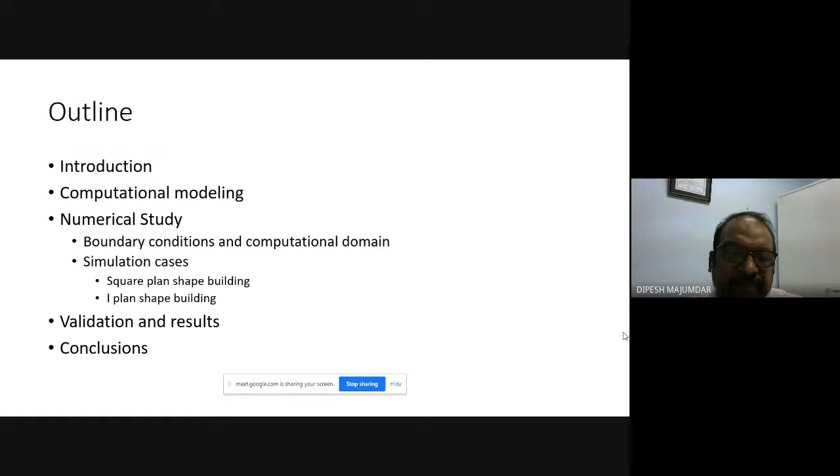An outline of this presentation: introduction, computational modeling, numerical study, and in the numerical study we'll discuss the boundary condition and computational domain, and simulation cases. There are two different cases we have studied: one is a square plan shaped building, and another is an I-plan shaped building. Then we studied the validation of the result, and finally we have concluded. So this is the basic outline of our presentation today.

Now, first of all, I will discuss the introduction part.

In civil engineering, structures nowadays face a great challenge everywhere because highly hazardous loads like earthquake, wind, and fire related loads are increasing day by day. As you know, especially this tropical cyclone intensity is increasing day by day, and for Eastern India, over the last 5 years, we are seeing the intensity and frequency of tropical cyclones increasing.

At the same time, we are constructing very different and complex shapes of buildings nowadays in India. So these two things are creating a great challenge for us.

Now, how to mitigate this type of challenge? That is a big issue, and for this particular research we have tried to study how wind load may be very crucial for a particular complex shape of building. That study we have done in this paper, and as I already conveyed, the complex shape of the building is a big issue.

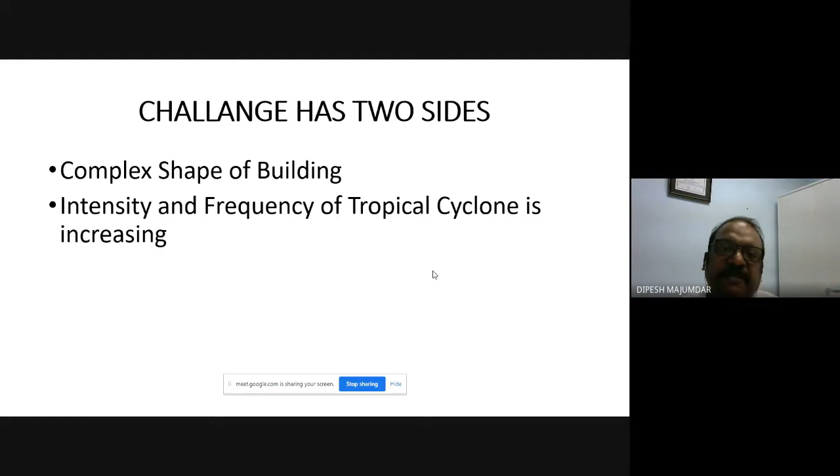So every civil engineer or structural engineer is facing two different challenges: the load is increasing or frequency is increasing, and at the same time the complex shape of the building is creating a great challenge to them.

At the same time, as you know, non-structural elements or glazings, like glass window facades, become a very vulnerable part, and we have seen this in the last Amphan cyclone in Kolkata. It was really hazardous, and various buildings faced this kind of hazard due to very high intensity of wind. Although it was properly designed and fabricated, various kinds of failure were still noticed and reported in various parts of Kolkata.

So that's why we have taken up this project to study what is the main cause, right? And this is our very simple model we have chosen during our study.

First of all, we have chosen a simple square shaped building in plan as a model study, and at the same time we have chosen another complex building to compare with an I-shaped building. For simplification, we have reduced the scale to 1 is to 300. And as you know, for this computational domain, as per Frank's model, we propose the overall boundary conditions.

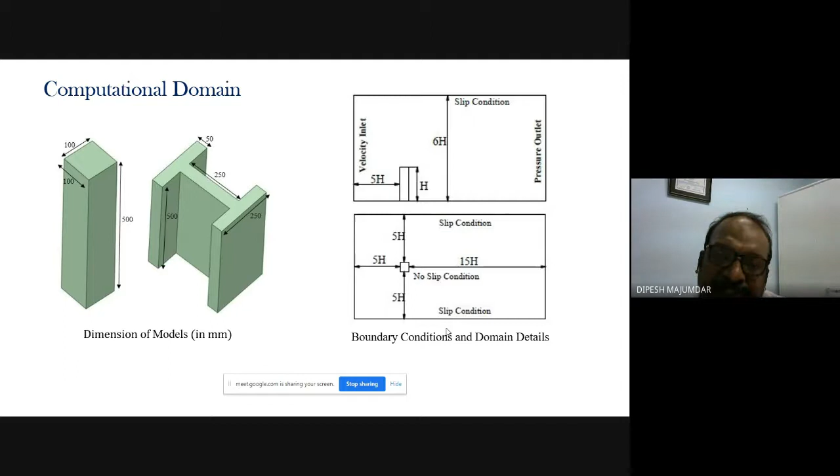And for velocity, we reduce it to 1:5, which is very common, and for the dimensional scale, we reduce it up to 1:300.

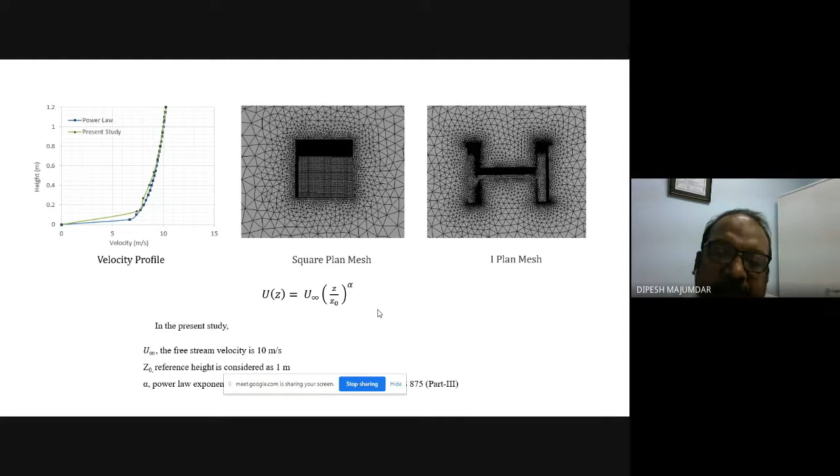This is the simulation case we have considered. For the wind, there are 3 different angles of incidence we have considered: 0, 30 degree, and 45 degree. For the square plan and I-plan, there is an extra angle, coming for 0, 30, 45, and 90. As 0 and 90 are same for the square plan, we have not considered that. For the I-plan, 90 degrees extra we have considered. And that is the different face that we have mentioned over there, A, B, C, D.

Here it is a different face, and that surface will be needed to understand the different pressure diagram that I will show you in my discussion, right?

Whatever numerical result we have produced in our numerical analysis, that analysis we have done with the K epsilon model, and this computer CFD analysis we have done with ANSYS, right?

And to match with the actual result, whatever value is given or provided in IS 875 part 3, we checked whether our model is working or not, or whatever our assumption is correct or not. We matched it, right? And this is the value that, whatever our meshing and whatever our assumptions, we matched it, and this is the property, this is the value that we matched.

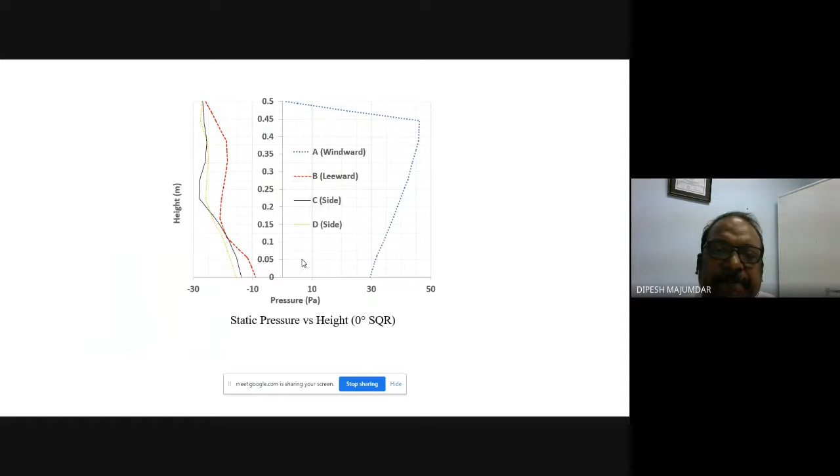30 and 45 degree you can notice over there, and on my next diagram, which is very important. See, 0 and 90 degree is very common, and it almost matches the same criteria, same diagram that I have shown you, like this static pressure diagram of 0 degree. But now, if you notice on the 30 and 45 degree, these two show really remarkable difference with respect to 0 to 90 degree.

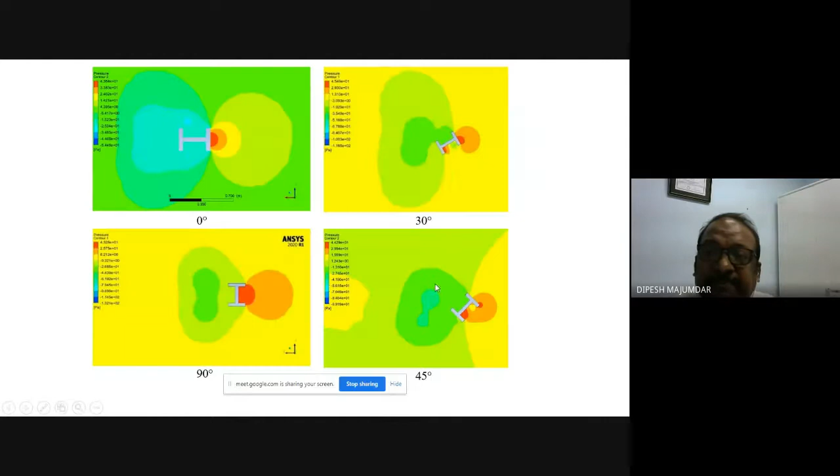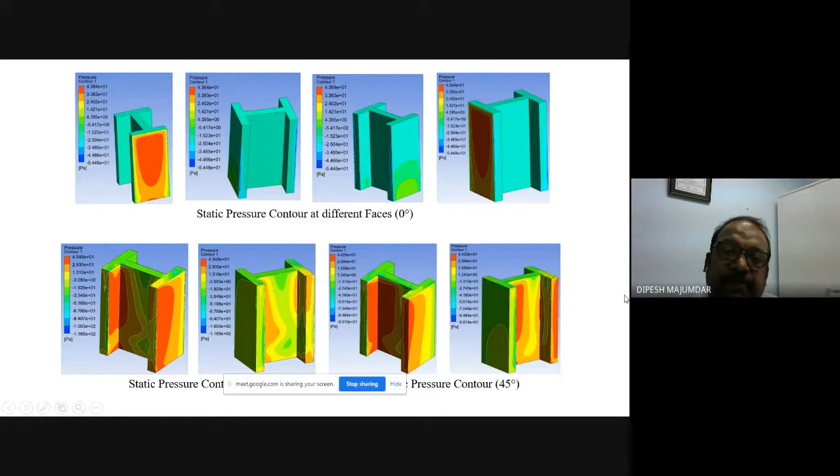This is the plan, and the pressure contour you can notice over there. See, in particular 30 and 45-degree angle, you can notice in this particular surface here that it is positive, and on the other side it is negative. So that positive and negative pressure may be very vulnerable for this kind of complex shape building. That is the thing I must convey.

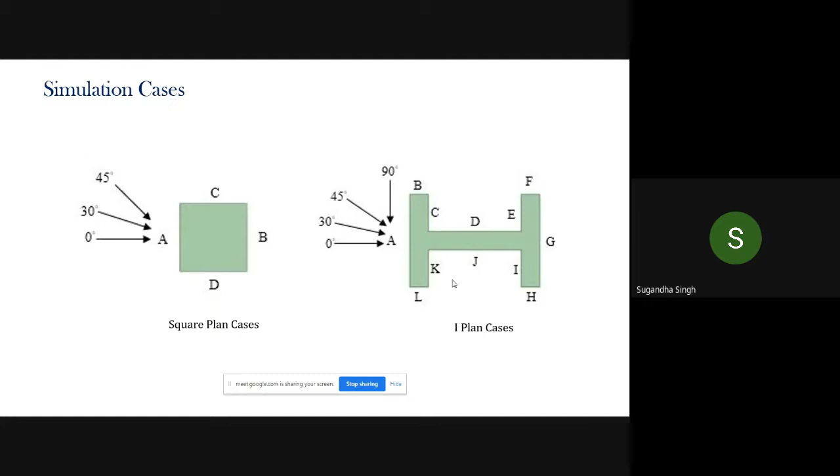So from the vortex, I guess your conclusion would be that we can find out the torsional effect on the building? Yes, yes, and then the torsion effect will affect the response. Yes, that's it, a secondary paper we are just working on over there. Okay, thank you, sir.

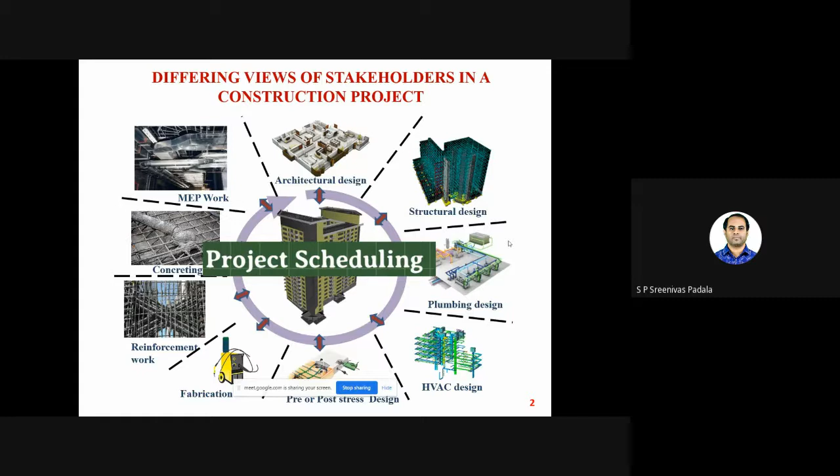So generally, if you talk about any construction project, we have different views of stakeholders. Every stakeholder has a different view: architectural design, structural design, plumbing design, till construction, and everyone works in isolation basically. So how to connect this is very important, because everyone is working for a common goal. Proper scheduling is very important. Scheduling is actually one of the critical success factors for completing a project with good profits in a given time, so we always require better scheduling.

So scheduling is generally nothing but planning your task day by day, to show how you're going to complete a project. For example, if I talk about any building project, what happens is you need to identify a set of activities—maybe 300 or 400 activities will be there to complete a project.

And you have to arrange them in a sequence manner. That is called scheduling, and we all know the critical path method, CPM. I think even in BTech you learned this in an elective course. It is one of the widely used project scheduling techniques, but it has one main limitation, which is overestimation of duration.

So CCPM is another technique, more advanced—critical chain project management. It was mainly developed from the manufacturing sector. I want to explore how it can be useful in the construction industry also, because it focuses on minimum duration—it helps minimize project duration by using safety buffers. It typically avoids human behavior errors, like student syndrome, Parkinson's law, and everything that generally happens in CPM schedules.

So for explanation, you can see this. The first one is the conventional project schedule, called CPM. If you talk about any project, let's say we have 4 activities or jobs to be done: excavation of the building, reinforcement fixing, concreting, and then finishing work. So you have 4 activities to be considered.

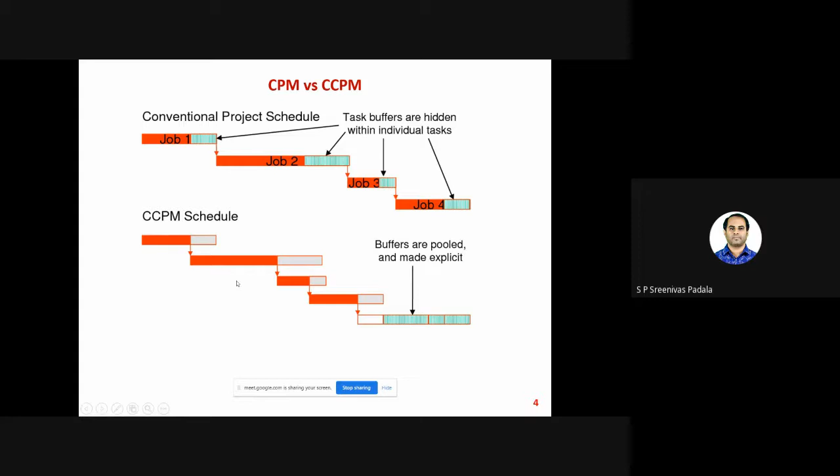But there's not only a buffer at the end—we also have buffers in between, which I will show with an example. The literature review revealed a lack of structured methodology to include or monitor buffers in construction schedules. So the objective of the study is to develop a framework, a methodology to incorporate and monitor these buffers in a project.

So we talk about buffer sizing, because when we talk about buffers, we need to estimate the size of the buffer. If you see the simple project scheduling network, activities 2, 6, 8 are critical activities. At the end of the critical activity, or critical chain, we have the project buffer, PB. We also use a feeding buffer, which links the non-critical and critical activities.

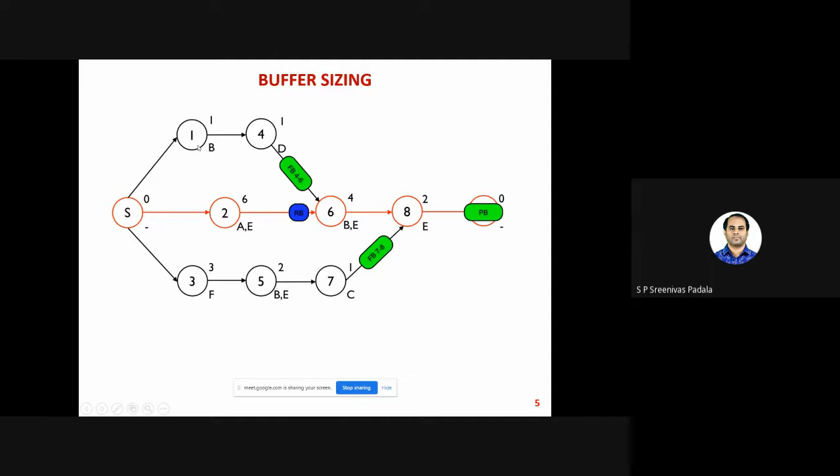This red one is, in layman language, very critical—if you delay these activities, 2, 6, 8, your entire project gets delayed. Whereas if you delay activities 1 and 4, or 3, 5, 7, it will not delay the entire project. So these feeding buffers will monitor and show the progress of non-critical activities, so that in the event of any conflicts, we can rearrange.

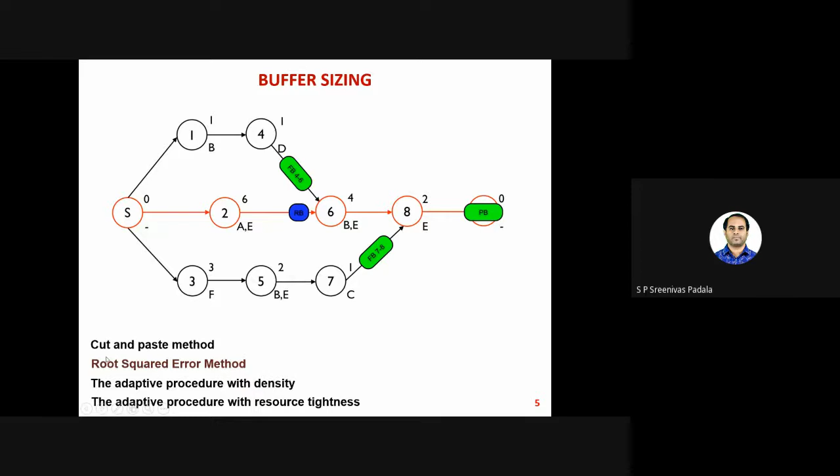There are different types of methods: cut and paste method, root squared error method, adaptive procedure with density method, then adaptive procedure with resource tightness method. Out of all these methods, I have selected root square error method because it doesn't use any rule of thumb, whereas other methods use some rule of thumb.

If you take the same example, I've explained how to calculate the buffer size for feeding buffer and project buffer. For any activity, we have to take 2 durations: one is a safe duration, then you have to take aggressive duration. Aggressive means it's the minimum time, basically. Aggressive or risky, safe duration means it has all the possible errors and all.

We assume some errors may happen, some uncertainty may happen, like that. We assume many things and we add on safe duration. Whereas aggressive duration means we assume that nothing is going to happen, nothing wrong is going to happen. That is aggressive duration. So in this root square method, we generally take the difference between the safe duration and aggressive duration, which is nothing but the root of sum of squares of the difference between the safe duration and aggressive duration for each activity.

For example, if I talk about project buffer, we take 2, 6, 8 activity. 2 here is there, 9 minus 6 whole square. Then 6 again, 6 minus 4 whole square. Then 8, 3 minus 2 whole square. And I have to give a square root.

So using this method, we can actually quantify the buffer size. The units are nothing but days, it can be anything, hours or days - let's say it is days, I'm taking it as days, then it will be days. Similarly, feeding buffer also you have to estimate in the same manner. This is how the buffer sizing is done.

This is not enough. Just by estimating the buffer sizes and reducing the project duration, it's not enough. You have to do some simulations before you start the project. As I told you, construction industry or construction projects are always uncertain in nature. So to quantify the uncertainty, I had taken low uncertainty, medium uncertainty, and high uncertainty in terms of sigma, basically nothing but standard deviation.

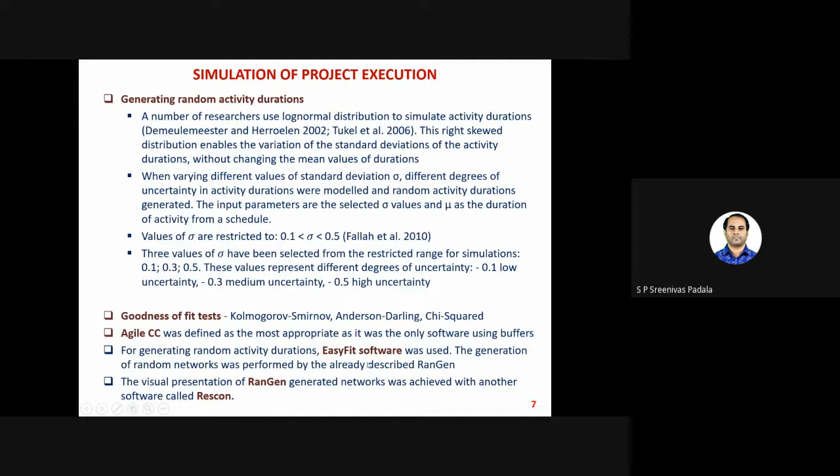We also conducted some statistical measures like goodness of fit test. Then we also use some software, because Agile CC is one of the software where you can incorporate buffers. This software was primarily developed for manufacturing industry, and we adapted it for construction industry also. Then we also use some other software like Easy Fit software, RanGen software, Rescon software, mainly for generating random numbers, for generating random activity duration within the given range.

This is a proposed methodology to implement this CCPM concept. Initially you have to develop the construction schedule, then you have to estimate the project buffer and feeding buffer, then you have to reschedule actually. Then, before you start monitoring the project, you need to check whether these feeding buffers are creating any conflicts. If it's creating conflicts, then you have to remove that part of the buffer and add it on the project buffer in the end.

If there are no conflicts, then you can identify the uncertainty and random activity durations can be generated and you can do simulations. You can also check the number of simulations - let's say we have taken this small project as 100 runs. You can also take 50, you can also take 200. So you can keep on trying, keep on doing iterations till you arrive at the best value. Once you do simulations, you can analyze the buffers, check what is the buffer consumption, and also check what is the progress of the schedule.

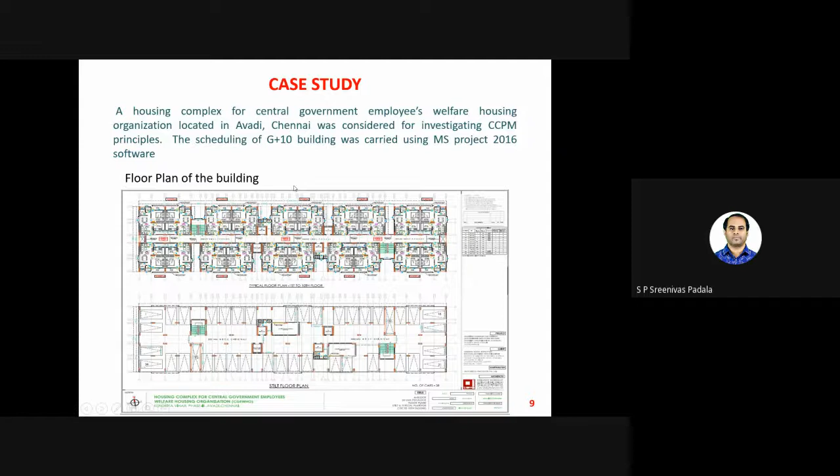So to implement this concept, we have chosen this case study - it's basically a welfare housing project in Chennai. It's a G+10 building. Initially what we've done is we have actually built an original schedule in MS Project. You can see that it's an 816 days project. We just loaded all the time, this is the sequence basically, this is nothing but a schedule. We also loaded the resources to determine the cost.

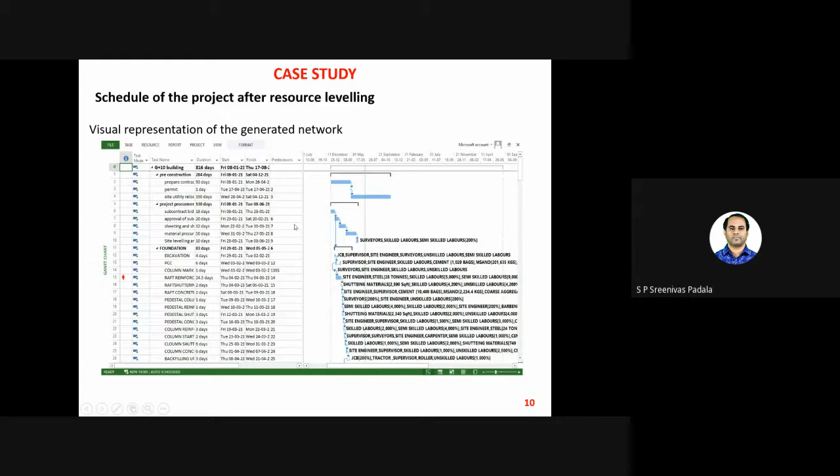And we also use Agile CC software. Mainly in this software, what we can do is we can implant the buffers. All the buffers can be planted in this. That's the best part of this.

And we quantified, so all the buffer will have to be estimated manually only. But once it is estimated, we can import this into Agile CC software, and it will show the reduced duration.

So once we estimate the duration, we've done some simulation runs and we try to understand how this feeding buffer is consumed. As you can see in this particular column, we have changed it in different dates. You can see, it's a simulation only, the dates are given. It is not yet happened, it's just forecasting.

So you can see at 0% consumption, this is the progress of the work. 30% of work is completed, and you see 74% of the feeding buffer consumption, 31% completed. This is for feeding buffer.

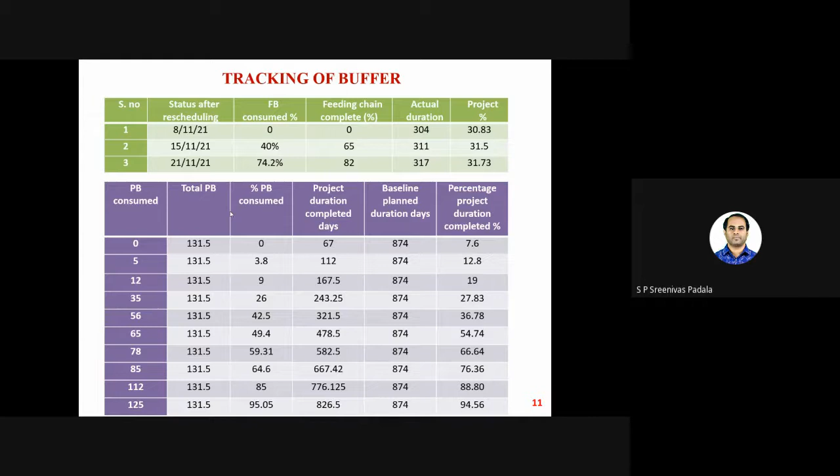And similarly for project buffer also, we tracked for different percentages, and we also track the project completion days. So as the feeding buffer is consumed, our project completion should also happen. I mean, our project should be completed before the entire feeding buffer is consumed. That's the logic. Let's see this diagram, from this you will understand what I'm trying to say.

The main idea is we should not consume the buffer before completing the project. You can consume all the buffer, but by the time you consume all of it, your project should be completed. That's the logic. So this is how we can monitor the schedules basically.

So we also did this across different uncertainties, like 0.1, 0.3, and 0.5 uncertainty. And we compared project duration with different uncertainties and with different buffers, like 10% buffer, 30% buffer, 50% buffer, and so on.

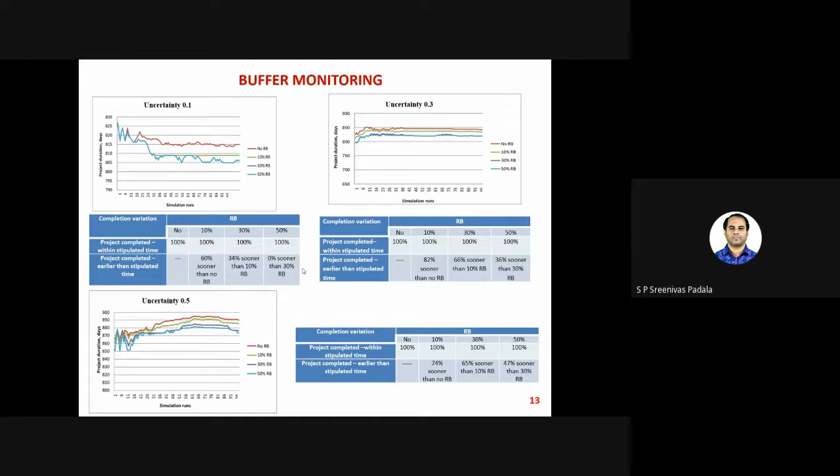So coming to discussions: the case study revealed that CCPM methodology has the potential to minimize the project duration by managing the buffer systematically, and the root square error method is one of the powerful techniques for buffer sizing.

And you can also see that for 0.1 uncertainty, different confidence intervals are generated, for example 842 to 849 days. And you can see that for 50% buffer, duration decreases a little bit compared to no buffer.

But for 0.3 and 0.5 uncertainty, there is not much difference. At zero buffer, it is 853 to 883 days, whereas at 50% buffer, it is 830 to 859 days. So what I'm trying to explain is, as the buffer size increases, the project duration decreases basically. That's the idea.

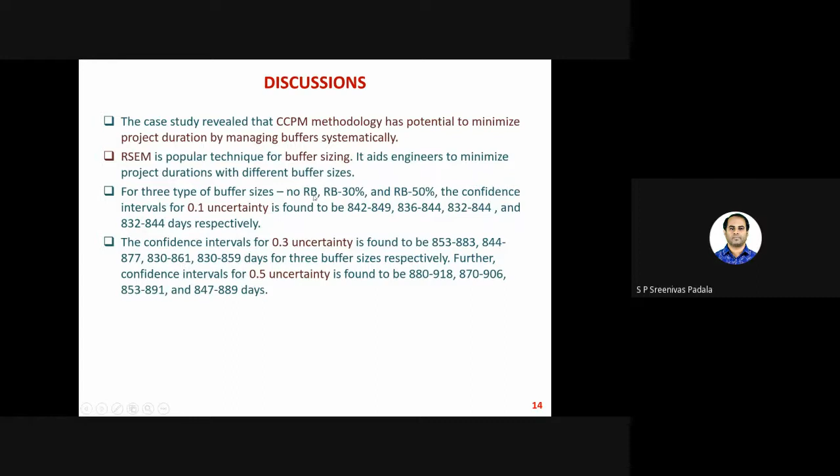So to conclude, what I can say is project scheduling is very important. It's essential for timely completion of any project, not only in construction industry but any industry we take, project scheduling plays a major role. So in this study, we developed a methodology to implement the CCPM concept in construction projects.

As I told you before, CCPM is a potential technique because it will generate accurate scheduling by considering the buffers. Unlike traditional techniques where we add safety buffers in a hidden manner, we actually put all the buffers at the end of the project or end of the non-critical activity. That's the best part in CCPM.

But again, it is not a decision-making tool. It will not give data like that directly. It will give some results, and using this concept we'll get some data, but you have to interpret the data based on your project. So it is not a decision-making tool, but it will support decision-making with necessary information.

As I told in the previous presentation also, accurate information is very important. Accurate input to the project should be given - that is more important than anything else. You can use different techniques, more mathematical or high-end software or high-end analytical techniques, but still if the information is not correct, if the input is not correct, then this concept will not work better. That's what CCPM does - it gives accurate or necessary information to the construction industries.

So these are my references. These are some of the important references I am showing in the slide.

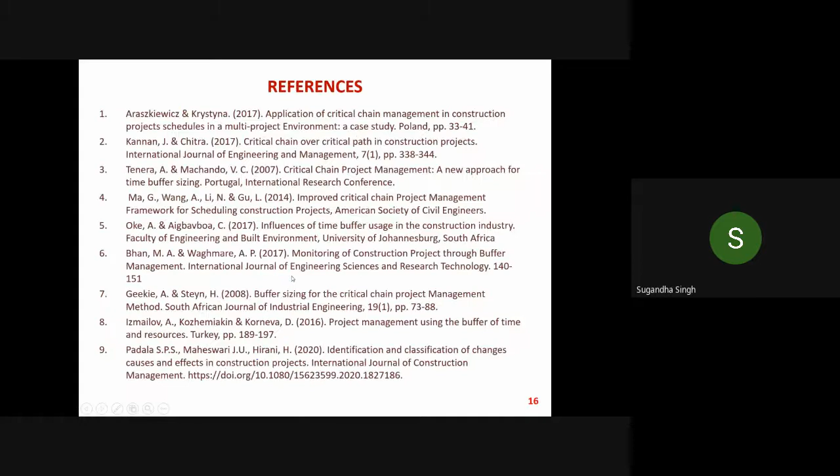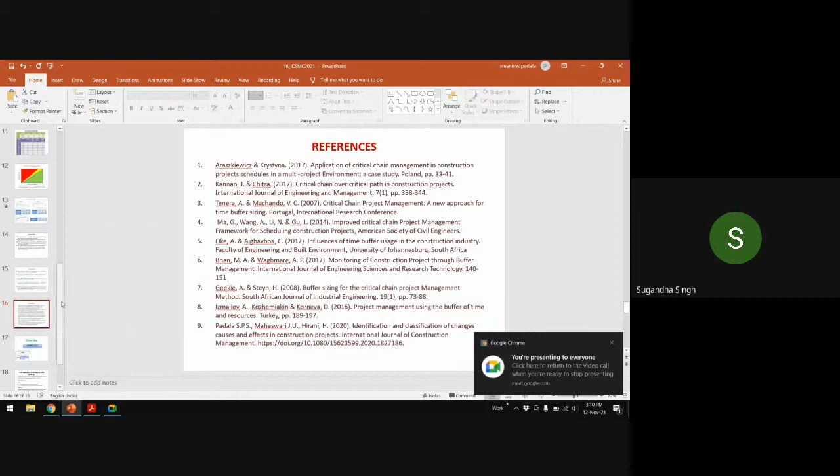Thank you, sir. It was a very informative presentation. Are there any questions from the audience? Please unmute yourself and ask your question. Anil sir, any questions? No question.

This project scheduling depends on the list of tasks that you have to perform during a project, which is decided in the planning phase, like tendering and all of that phase. Now, how does anyone doing the project monitoring incorporate anything like finance problems in the middle of the project, or snags or things like that? Is there a provision for that?

Yeah, that's what the buffer concept is - the buffer takes care of all types of problems. If we have any sudden issue, like COVID came and the project is delayed by 3 months, let's say, this buffer will take care of that delay. Or if any financial problems come, like cash flow is not good suddenly, or the contractor has to change, or maybe the client wanted to change the contractor - so all sorts of uncertainties like delays, financial issues, even quality issues, everything can be taken care of by the buffer. That's the idea of the buffer.

It's like a safety buffer which is added to the end of the project, so you can use it if required. But then the follow-up question is, when you were calculating the buffer, I thought that was based on the existing activities. Yes, existing activities, that is correct. So if we calculate that based on existing activities, what is the provision to account for such major delays?

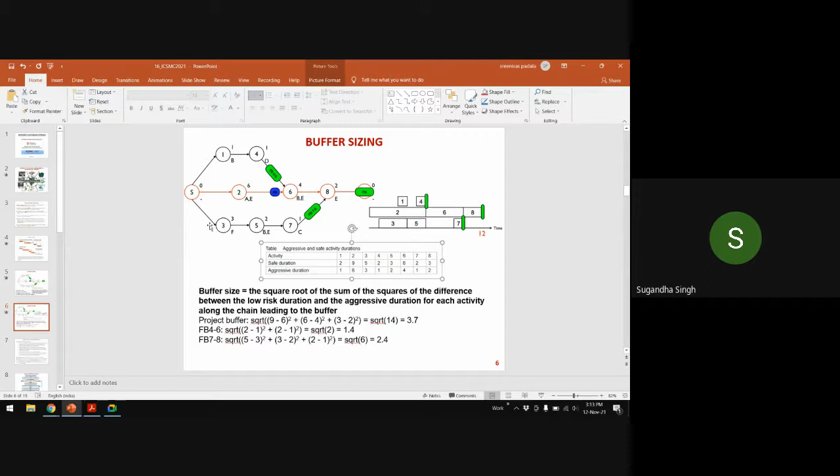All right, so I see you have incorporated uncertainties as well. Yes. So it would be more of a probabilistic scheduling in a way. Right.

Probabilistic is okay, probabilistic only. That's why, as I showed here, I gave a range - 6 to 9 days for that activity, starting from 6 days to 9 days. So we have that range, and that's why I simulated to quantify that uncertainty. We use normal or log-normal distribution, which is equivalent to triangular distribution, to quantify the uncertainty.

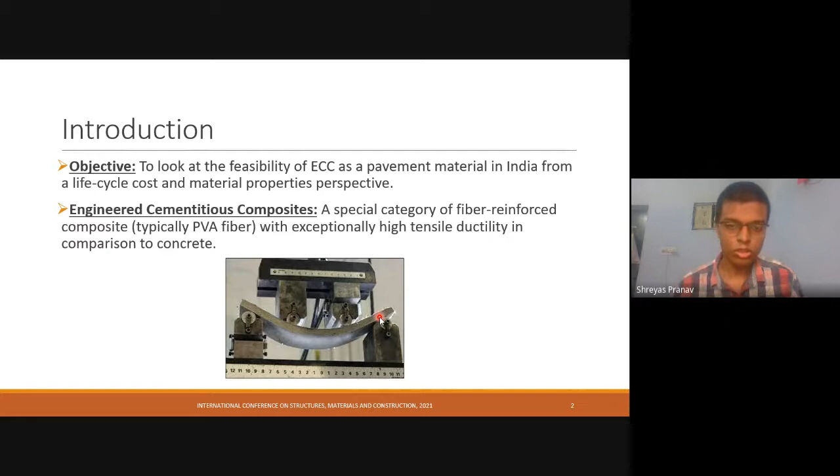Coming to the need of this new material in pavements - first, what are the problems in existing pavement materials. When it comes to asphalt, we all know it comes from petroleum, and petroleum reserves are fast dwindling. According to many world energy reviews, it is not expected to last more than 50 years. We also have our own experience that asphalt pavements are very prone to distresses, cracking, potholes, and so on. The natural alternative is concrete, but in concrete there are other issues - it typically has to be made using joints, because of its low ductility and the stresses that appear in concrete pavements.

As soon as we talk of joints, there is the problem of material ingress into joints, acid attack, joint spalling, pumping, and so on. Because of these reasons, both these types of pavements require a lot of repairs, and they have a very low service life, close to 20 to 30 years approximately - asphalt pavements can even be lower than 20 years sometimes. So our proposition is to offer a material which gives a higher service life and lower requirement of repairs with high durability.

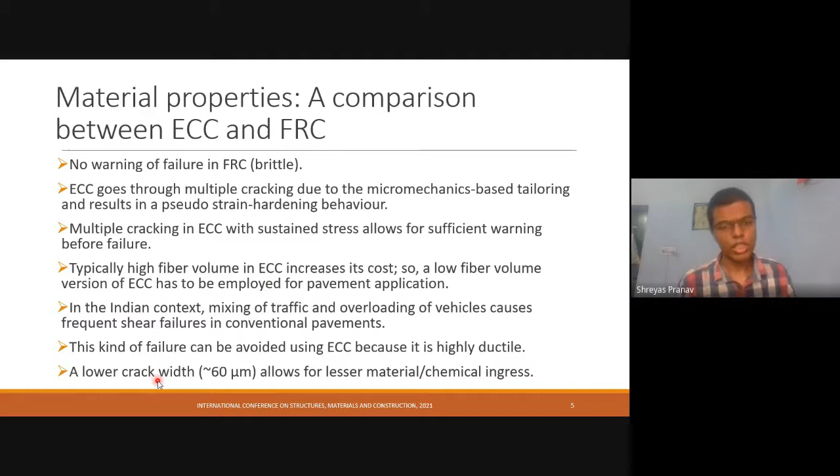Over the life cycle, by which I mean we have taken an analysis period of 50 years, we tried to compare the total life cycle cost, including all the repairs and all the labor costs and maintenance, everything. Per meter cube, it turns out to be around 20,000 for RCC and about 14,600 for ECC.

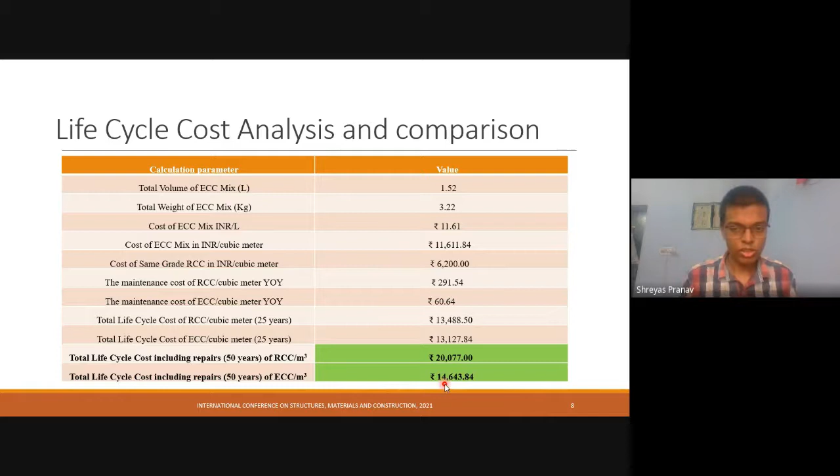In conclusion, as we have already discussed, from a material properties perspective, it was seen that for the Indian context, a high tensile ductility material will offer a much more durable pavement than conventional concrete and asphalt. The self-healing and tight crack width allow for lower material ingress.

Using low fiber content is important for the Indian context because there is a huge road network and cost effectiveness is very important. This final life cycle cost assumes low fiber content compared to typical ECC, and the life cycle cost analysis indicates up to a 30% reduction.

This is compared to RCC pavements, but over a 50-year analysis period, because in 50 years the RCC pavement will have to be rehabilitated multiple times, which is not the case with ECC. If you consider only the initial cost, ECC is much more expensive than RCC, but over a long period of time it eventually results in a reduction.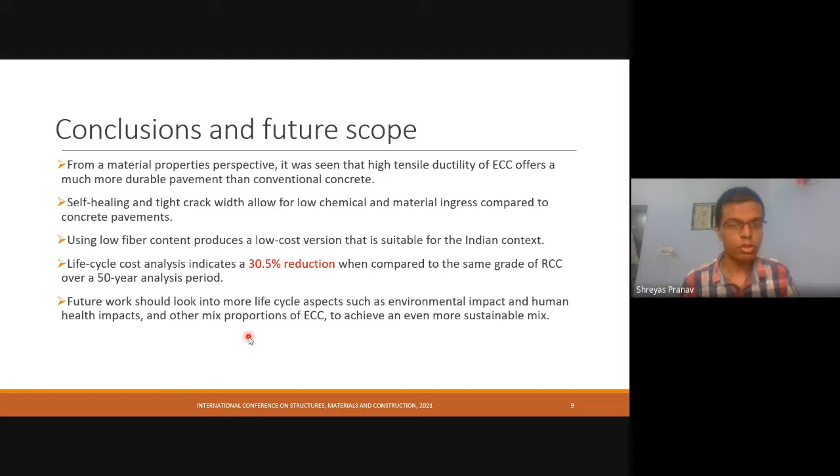But this is an elementary study, and there are many more aspects of life cycle that can be considered, such as environmental impact and human health impacts, and other mix proportions of ECC, so that even more sustainable mixes are formed, which can offer even more reduction in costs and environmental impacts.

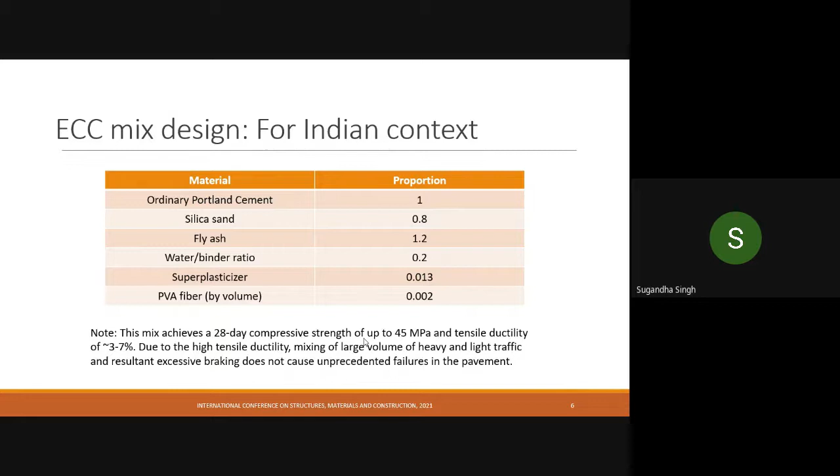Another thing I wanted to ask is, you said that the panels or stretches of ECC can be much longer than concrete, something like that, right? Yes. So how feasible are those panels construction-wise? Can you actually construct that length of road at once for ECC? Of course there is some limitation, you cannot go on constructing the pavement for as long as you want.

At one point we have to stop, but in principle it is possible to construct longer ECC pavements than concrete because it will take care of the stresses on its own. There is no need to prepare separate slabs like 1 meter or 3 meter slabs like we do in concrete. So that way, jointless ECC pavement is what you were discussing. Yes.

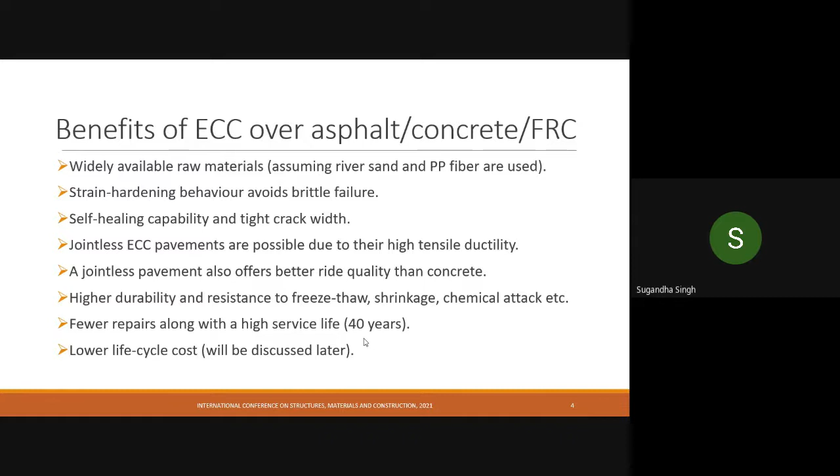Ms. Pratibha will be presenting on utilization of plastic waste as an alternate binder and plastic coated aggregate in interlocking paving blocks.

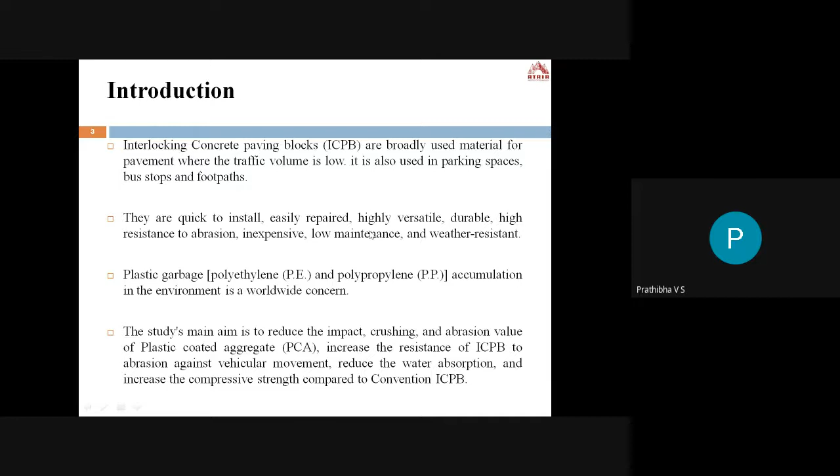After the casting of ICPB, it is tested for mechanical properties at different curing durations - 7, 14 and 28 days. Compressive strength, abrasion value, and water absorption tests are conducted.

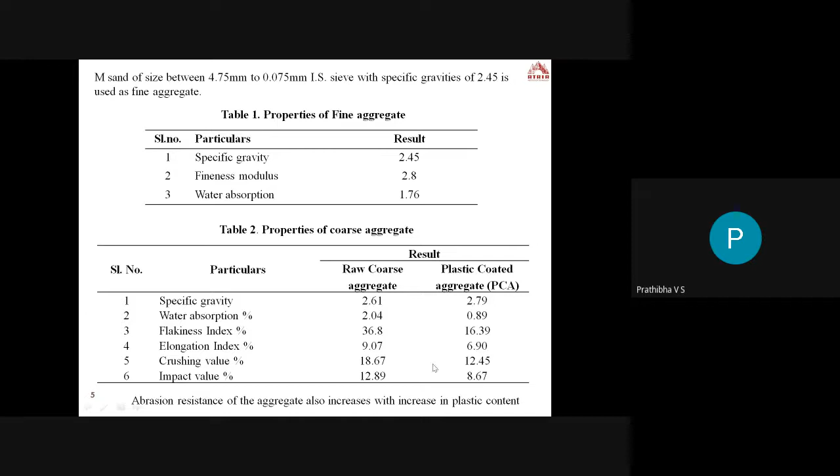Which offers more resistance to crushing and impact load.

So next coming to the mix design. As I said, we have used M40 grade concrete, and the water cement ratio is 0.38. We have prepared 5 different mixes.

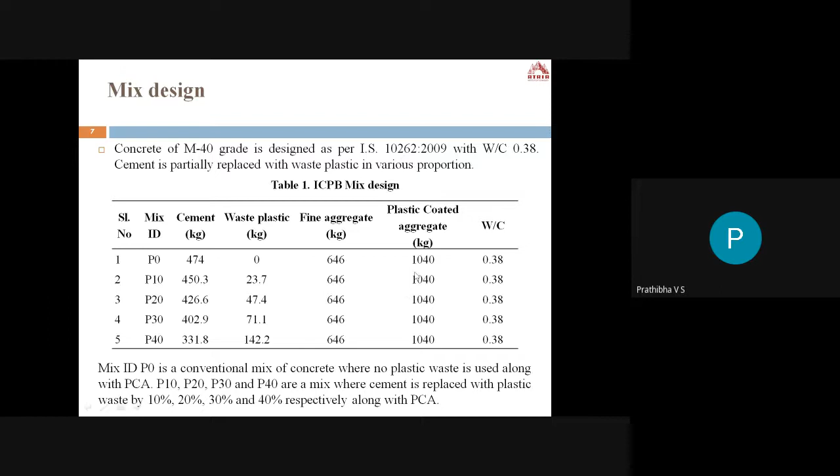P0 in the mix design represents the conventional concrete, whereas P10 means 10% replacement of plastic waste as a binder to the cement. P20 is 20% replacement of plastic waste for the cement, P30 is 30%, and P40 is 40% replacement. Here the fine aggregate content remains the same, whereas the raw aggregate is completely replaced by PCA, the plastic coated aggregate.

Next, coming to the mechanical properties of the ICPB blocks, this shows the compressive strength of the concrete block pavement.

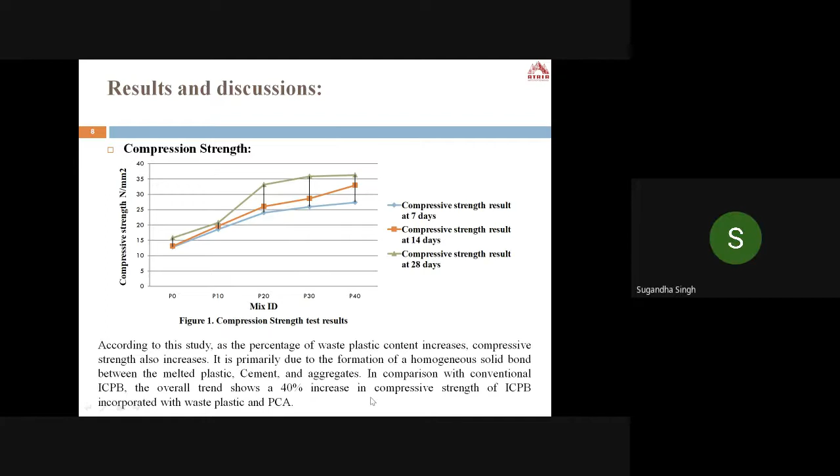The result shows the compressive strength of the ICPB for 7 days, 14 days, and 28 days curing. With the increase in plastic percent, there is an increase in the compressive strength, even though the plastic content is reducing other material. So it is increasing by around 40%.

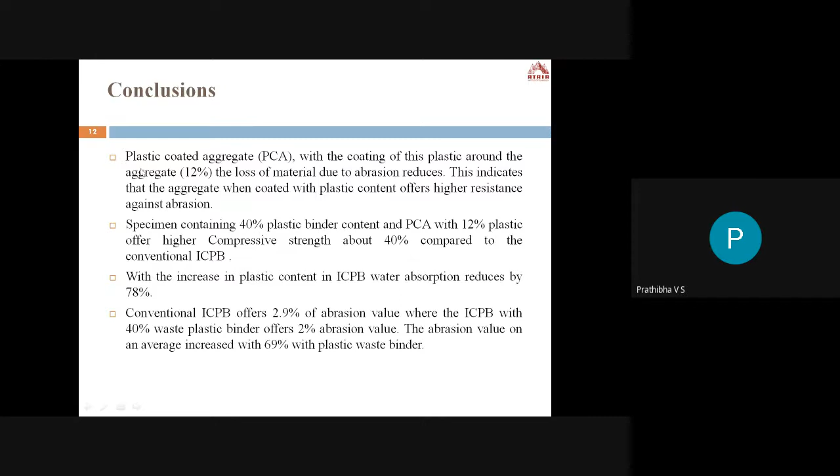So it is even economical, and we can see the strength parameters and also the abrasion resistance. It is more helpful by using the plastic waste in the interlocking paving blocks.

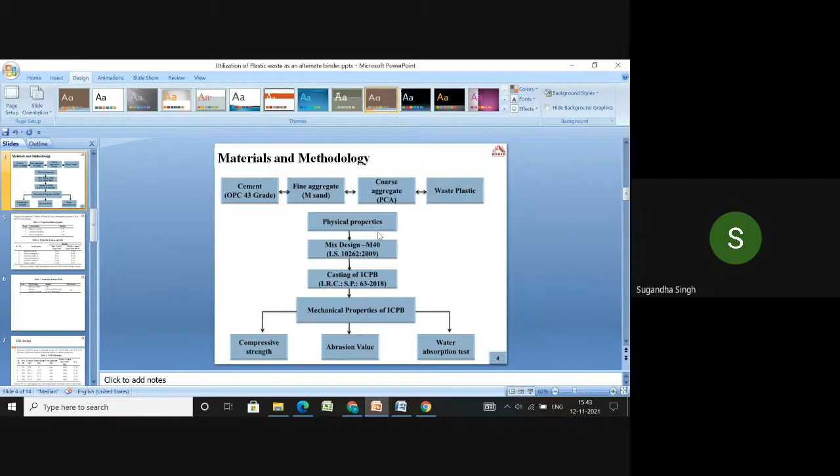Yes ma'am, here water absorption is lowered. However, my first question is why is the actual weight reducing? Actual weight is reducing because the cement content is reducing. The density of cement is 1.44, whereas the density of plastic waste is 0.99. So as we increase the plastic content, the weight of the block is also reducing.

What is the implication of the reduction in water absorption in terms of concrete pavement? If the block is getting saturated with water, there may be chances of stripping of the aggregate or stripping of the materials, and it may also reduce the strength of the subgrade. So if we reduce the water absorption percentage of ICPB, there will be an increase in strength.

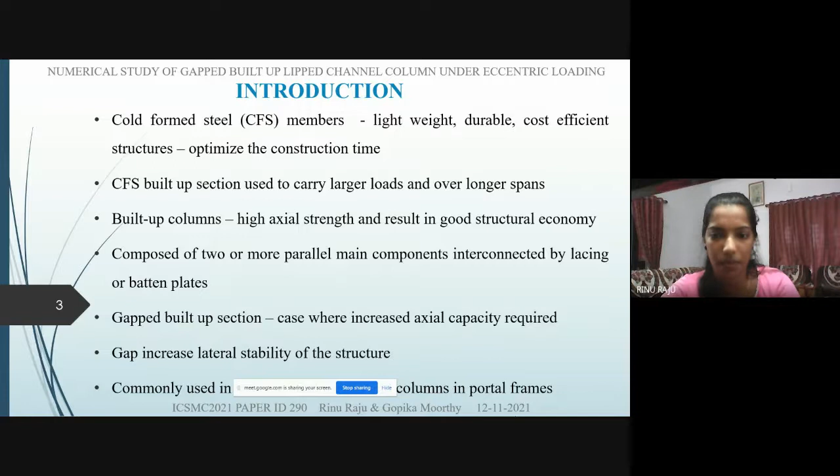The objectives of the study are to investigate the behavior of back-to-back gapped built-up CFS columns under eccentric loading, to study the effect of parameters such as link channel spacing, gap width, and slenderness on the performance of the column, and to investigate the influence of the web stiffness. This is the methodology. Moving on to the validation.

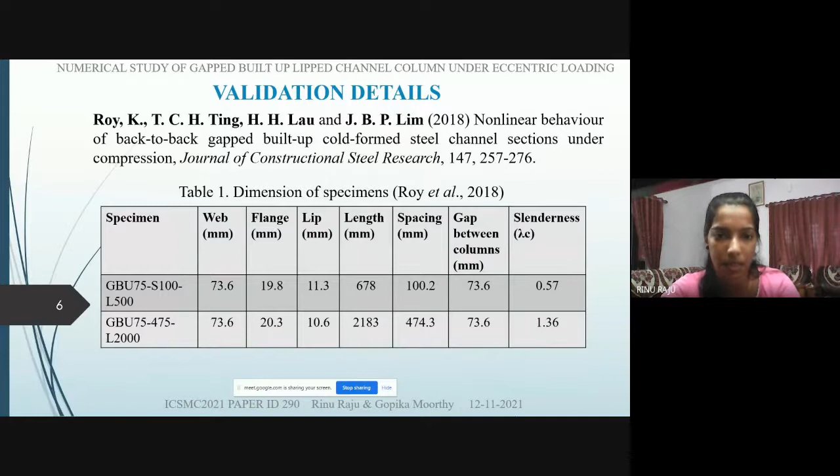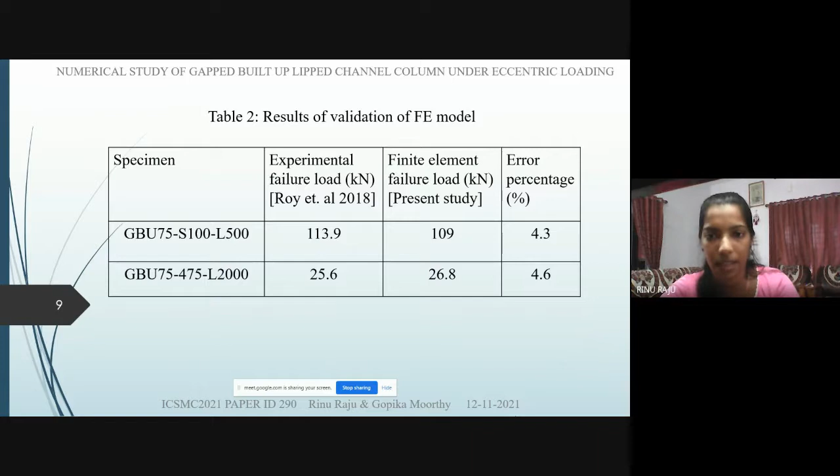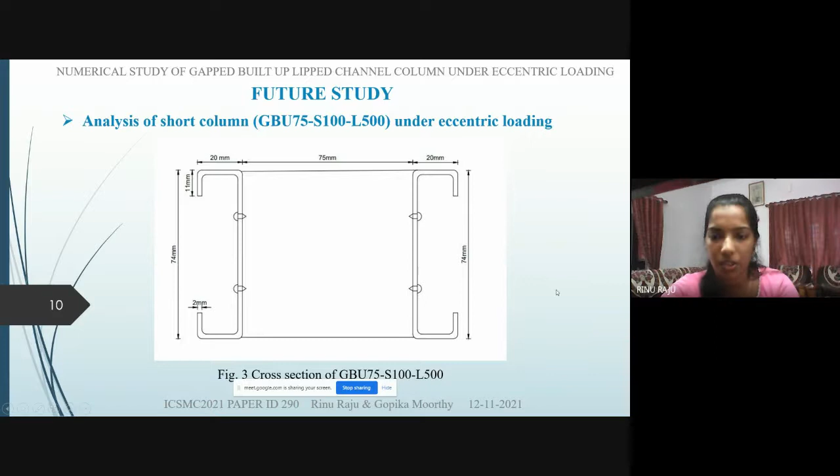As shown in this figure, this gapped built-up column consists of two main channels placed back to back with a gap in between them, and the gap is formed through the intermediate link channel provided between the webs of this back-to-back channel section. The section labeling is such that GBU75 indicates back-to-back built-up channel with a gap width of 75mm, S100 indicates intermediate link channel spacing of 100mm, and L500 indicates column length of 500mm.

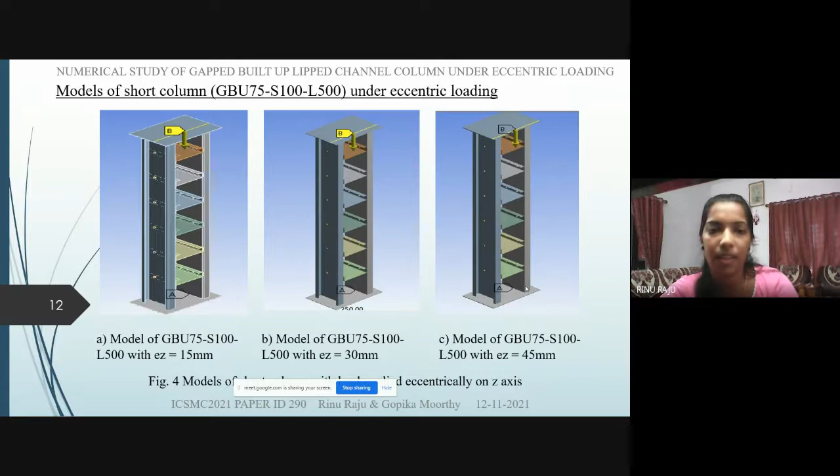These are the models of the short column. A nonlinear analysis was conducted on ANSYS workbench, and these are the models of this short column under eccentric loading. Here the eccentricity varies from 15mm, 30mm, and 45mm. This is a top view of the loading plate with eccentric load applied on the z-axis.

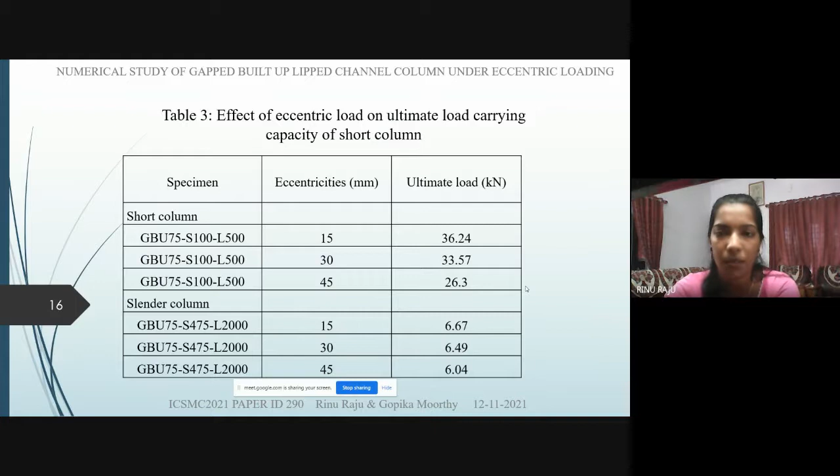Two main parameters were studied here: one is intermediate link channel spacing and the other is gap width. Moving on to the first parameter, that is the effect of intermediate link channel spacing.

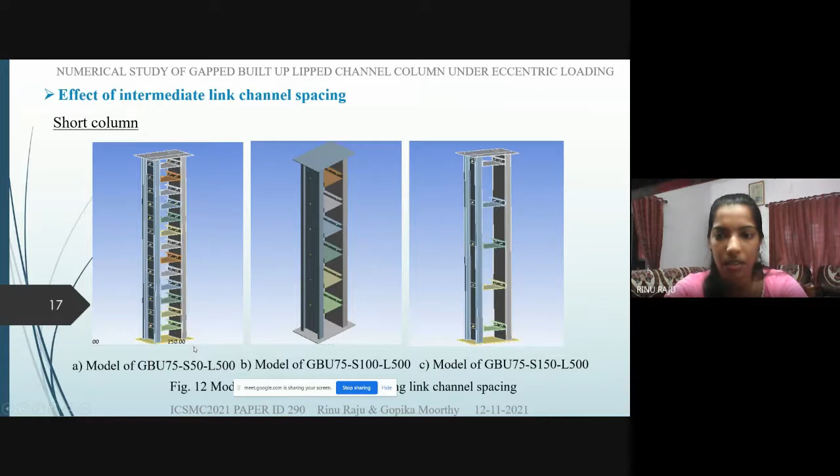Intermediate link channel is a channel provided in between the gaps of the main channel section. The spacing of this intermediate link channel varies from 50, 100 and 150 mm, and these are the models of the short column with varying link channel spacing.

For short column, the gap width remains the same as 75 mm and the link channel spacing varies from 50, 100 and 150 mm. As the link channel spacing increases, the load carrying capacity gets reduced.

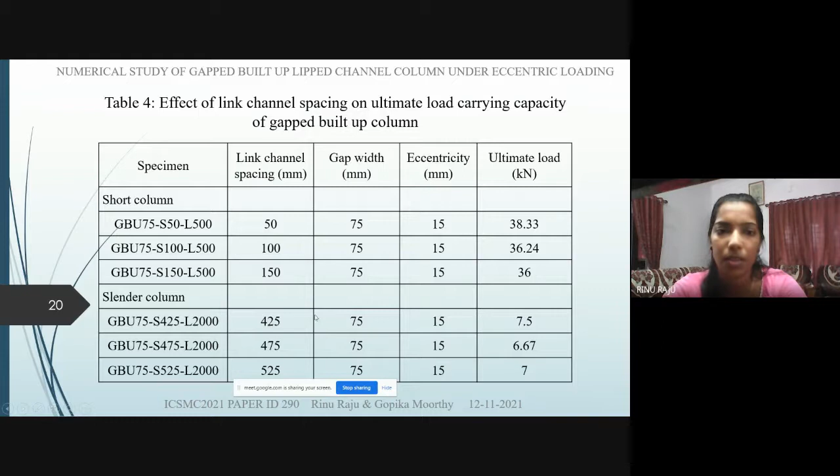In the case of slender column also, the gap width remains the same as 75 mm and only the link channel spacing were varied, that is 425, 475 and 525 mm. Here also, as the link channel spacing increases, the load gets reduced.

Next one is the effect of gap width. Gap width is the width of that gap provided in between the main channel section. The gap width varies from 50, 75, 100 and 125 mm.

In the case of short column, the link channel spacing remains the same as 100 mm and the gap width varies from 50, 75, 100 and 125 mm. For slender column, link channel spacing remains the same as 475 mm and only the gap width varied.

As the gap width increased, the ultimate load carrying capacity gets reduced in the case of short column. In the case of slender column, as the gap width reduced to 50 mm, there is a considerable increase in load obtained - about 10 kilonewton was obtained as the ultimate load, and after that the load gets reduced.

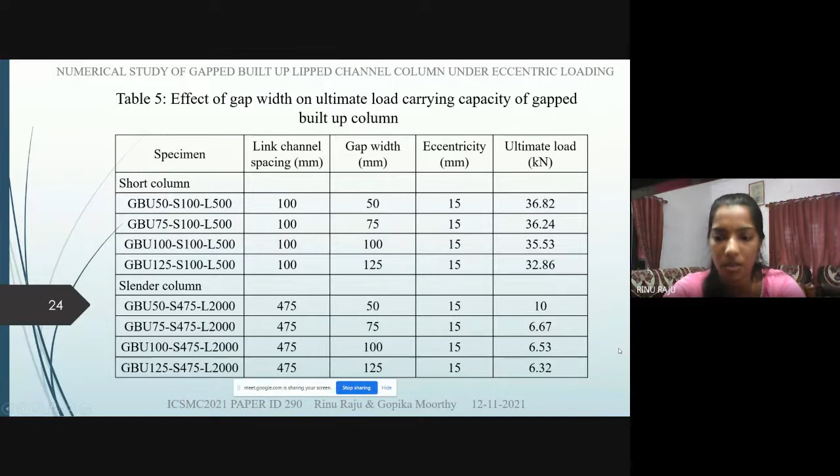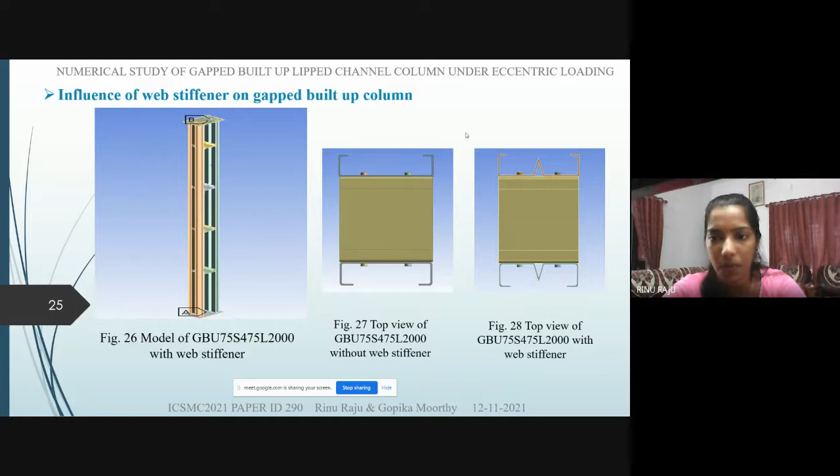Moving on to the conclusion. The study was conducted on this gap built-up column under eccentric loading, and parameters such as link channel spacing, gap width, and slenderness were examined, along with the influence of web stiffener.

This analysis concludes that eccentricities had a significant influence on the ultimate load carrying capacities of these built-up columns. The load carrying capacity decreases with increase in eccentricity values, and reduction in link channel spacing improves the load carrying capacity. The maximum load was obtained for a link channel spacing of 50 mm.

In the case of short column, varying gap width does not produce much improvement in strength, whereas in the case of slender column, when the gap width reduced to 50 mm, a greater improvement in ultimate load was obtained - about a 50% increase in load.

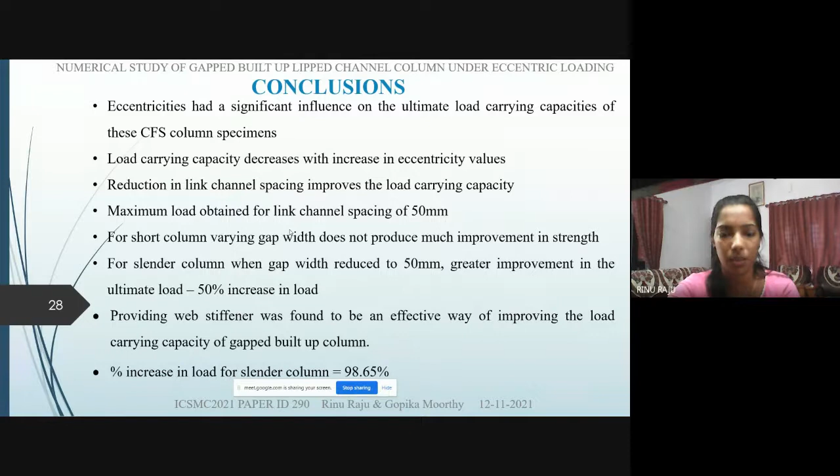Providing web stiffener was found to be an effective way of improving the load carrying capacities of this built-up column, and the percentage increase in load for slender column by providing web stiffener was about 98.65%.

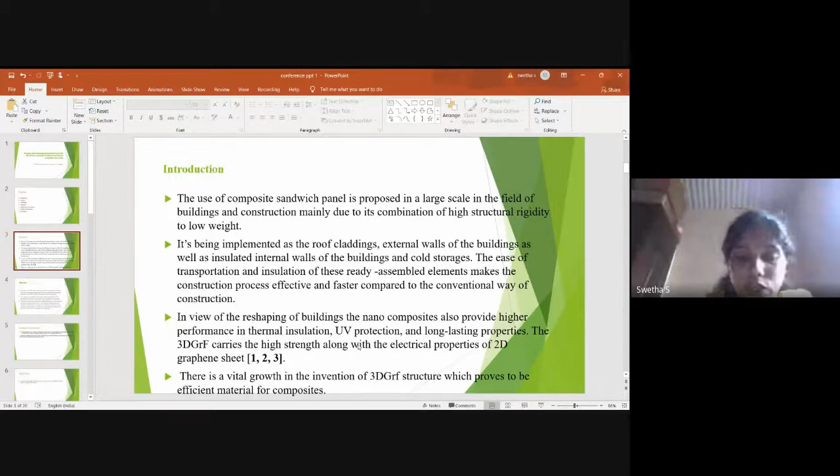The 3D graphene core, the 3D graphene foam carries high strength along with the electrical properties of 2D graphene sheet. There is a vital growth of the invention of 3D graphene structure, which proves it to be an effective material. In this paper we have studied the functionally graded carbon nanotube reinforced polymer faces with three-dimensional graphene foam, and I have studied the dynamic properties of this structure as well as the static properties.

The equivalent properties of the reinforced carbon nanotube and the 3D graphene foam are calculated, and the porosity and mass coefficient relationship are calculated from the mechanical properties of 3D graphene. For dynamic properties, we have used Hamilton's principle here. The third order shear deformation theory is implemented.

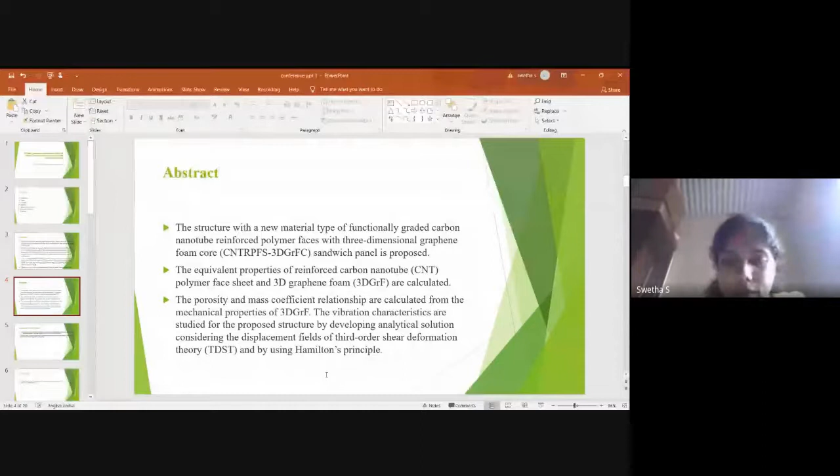The advantages of the sandwich panel: we know it is used in transportations, bridges, aircrafts, mainly buildings, high speed trains as well, because of its high strength to weight, low weight capacity. And the objective: the dynamic characteristics of sandwich panel with 3D graphene core and FG CNT reinforced polymer composite.

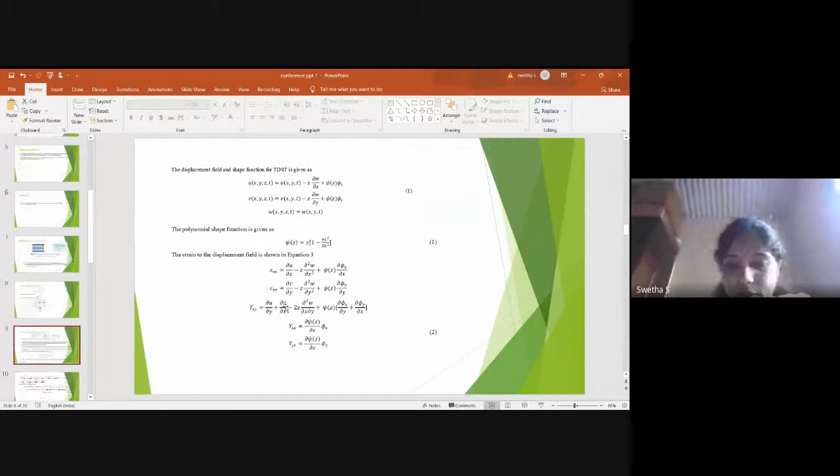The first order shear deformation theory and sinusoidal shear deformation theory were used earlier, but here I have used the third order shear deformation theory again for the dynamic property as well. The strain displacement concerned with the stress is given here, and the stress relationship is formulated in a matrix format. The abbreviation used here is 3D graphene and UVP, which is nothing but uniformly varying porosity and non-varying porosity surface.

Now, here in static analysis, we have used the virtual work principle formula, and for dynamic work, we have used Hamilton's principle. In Hamilton's principle and in the virtual work principle, the only difference is we have T here, which is something that in Hamilton's principle...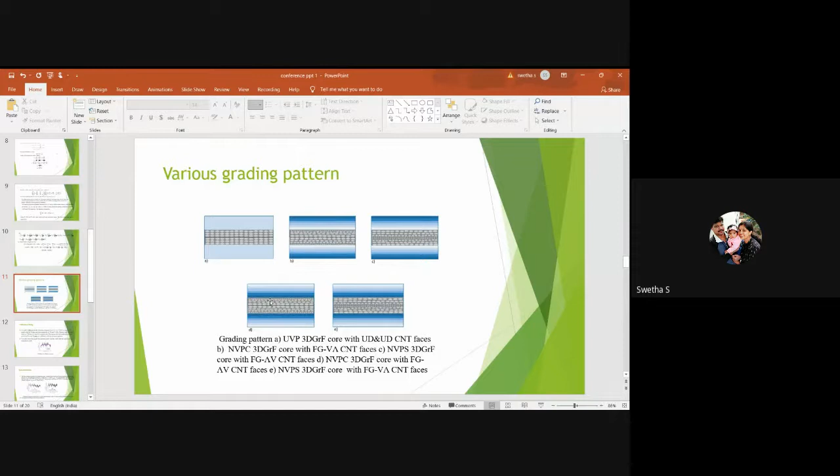The core is varied in B and C. You can see the difference here: bigger bubbles or holes in one, and in the C image, smaller holes. D and E show the non-varying porous surface, where there is variation of material distribution across the surface of the core.

Next is the validation study of my research. I have used the Liu and Lee paper, which gives the vibration response for a 0.4 by 0.3 by 0.01 meter sandwich panel with facing and core properties of 70 and 7 GPa. We know that the density and Young's modulus properties of graphene core and CNT are tremendously high, in terapascals, compared to steel and other metals.

So the numerical and analytical results given by Liu and Lee were validated with the present approach. The validation study proves that all my results match well with the numerical and analytical results of the literature. In the results and discussion, the free vibration response of the sandwich panel is studied, after which the forced vibration properties are also calculated.

The vibration response of FGCNT reinforced polymer foam sandwich panel with CNT and porosity coefficient is also shown. Now the analysis is repeated by changing the non-varying porous core porosity coefficient to 0.6, and the response is shown in figures 5A and 5B.

This is the response given. Comparing figure 4 and 5, it is noticed that a higher shifting resonance frequency is observed in figure 4, due to the elevation of variance in dynamic stiffness that increases the porosity coefficient as a whole.

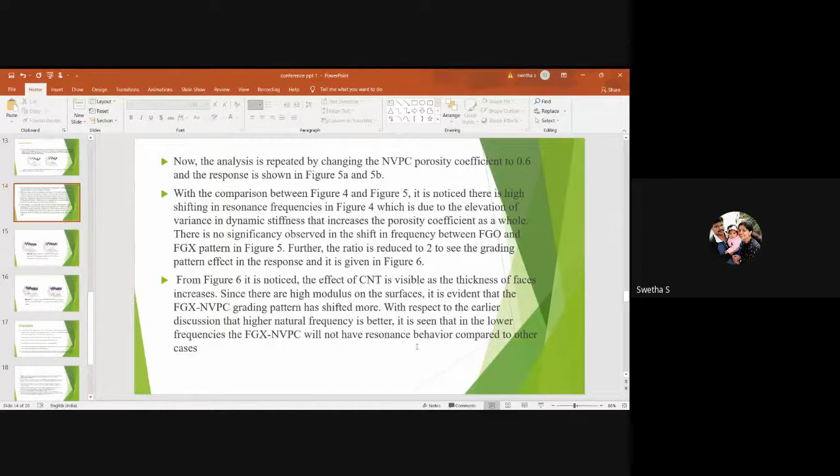As the porosity coefficient increases, there is an increase in resonance frequency. For the NVPC pattern, the resonance frequency shifts right as the porosity coefficient decreases. As this paper presents the characteristics of a lightweight composite sandwich panel, the results obtained can be used for designing sandwich panels for various applications where lightweight sandwich structures are preferred. So these are my references.

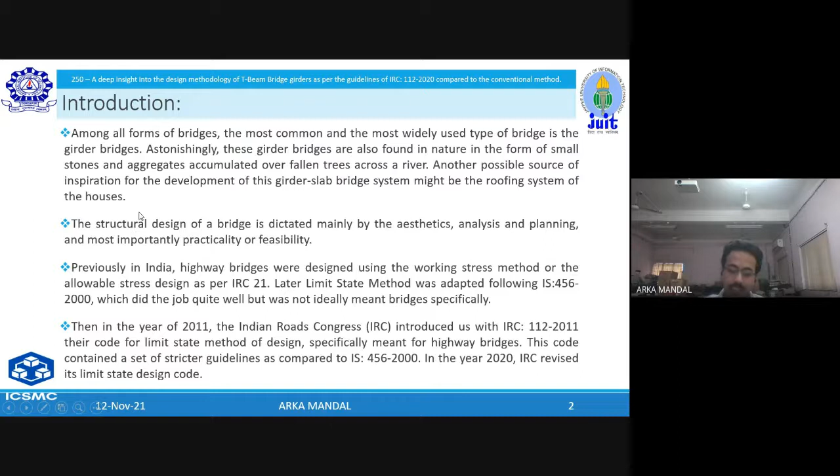Previously in India, highway bridges were designed using the working stress method or allowable stress design as per IRC 21. Later, the limit state method was adapted following IS 456-2000, which did the job well but was not ideally meant for bridges specifically. Then in 2011, IRC introduced their code for limit state design, IRC 112-2011, which contained a much stricter set of guidelines compared to IS 456. Later in 2020, this code was further revised.

For design methodology, we mainly have two types: the ultimate limit state and the serviceability limit state. Basically, limit state refers to that system and combination of loads under which a structure does not give satisfactory results, both in terms of serviceability and strength.

IRC suggests that all sections must remain plane before and after bending. The plane of bending must coincide with the principal axis of the element, and strain compatibility for tension as well as compression must be satisfied. These provisions apply only when members are elongated, and regions of discontinuity caused either by variation in geometry or high transverse loading should occur in only small portions along the length of the member.

IRC 112 allows us to use any elastic method for the analysis of two-way slabs, and the most commonly used method is Pigeaud's curve method. Since this method is only applicable for centrally placed loads, for non-central loads we can use appropriate superposition principles. For load distribution among the longitudinal girders, the most frequently used method is Courbon's method. However, there are other methods as well, like Hendry-Jaeger's method or Guyon-Massonnet's method.

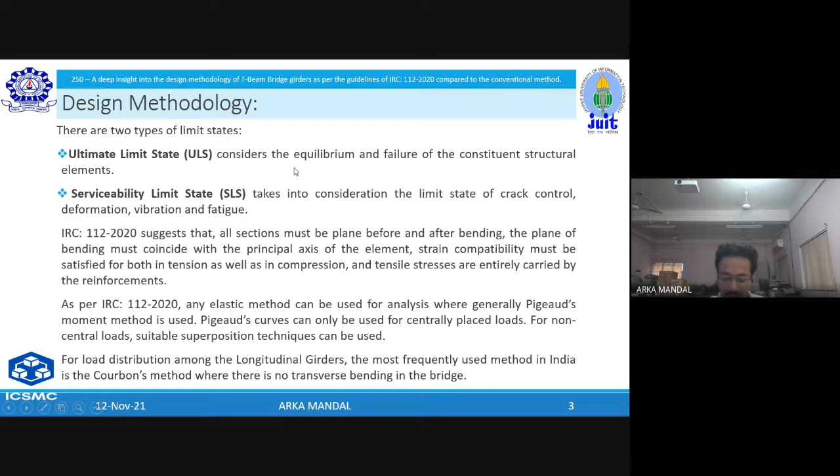For material properties, IRC permits the highest grade of concrete to be M90 and Fe 600 for steel respectively, both conforming to IRC 06-2014. The limiting strain for concrete up to M60 grade is constrained to 0.0035; beyond this, values should be obtained from the given code.

Now for a sample problem, we have this bridge cross section. We need to note that the width of the carriageway is 5 meters. Mainly, the width of bridge cross sections is generally more than 5.3 meters, which accommodates all sorts of vehicles like class A and class B simultaneously. But in this case, the width is less than 5.3 meters.

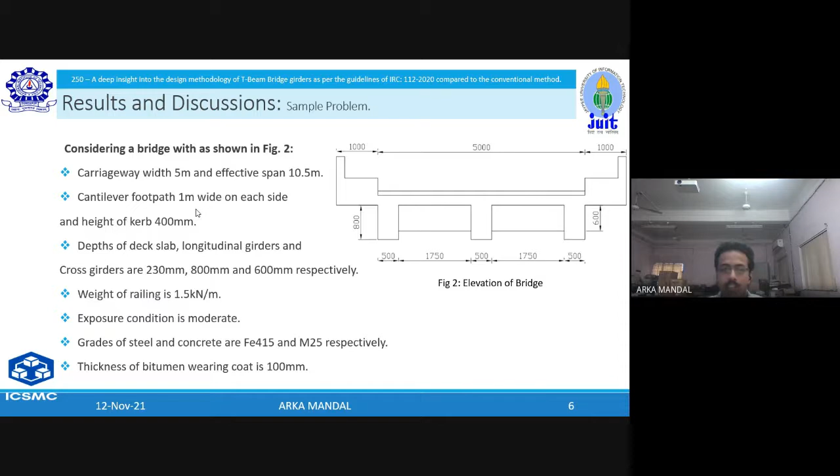As shown in the previous figure, the width of the cross girders is 500 mm, and the deck slab is 2.67 meter by 1.75 meter. Since the aspect ratio is less than 2, it will be treated as a two-way slab.

As previously said, the width is less than 5.3 meter, and so it shall be loaded with a UDL of 500 kg per meter square as specified by IRC 6.

Pigeaud's method can be used for the evaluation of moments for the two-way slabs, and the moment coefficients can be found from the Pigeaud charts based on the aspect ratios.

IRC 6 2017 suggests that there should be a minimum 150 mm gap from the curb of the bridge and the vehicle. But in reality, there is a high chance that this provision will not be followed. In that case, we need to be cautious and design the curb so it can take the vehicle load in accidental situations. So for that case, the curb should be designed as a cantilever slab.

IRC 112 and IS 456 use the same expression and the same factors, but the breadth of concentration area is different for IRC 112. IRC considers an extra provision by adding twice the thickness of the wearing coat, thus reducing the load, which we can see from table 1.

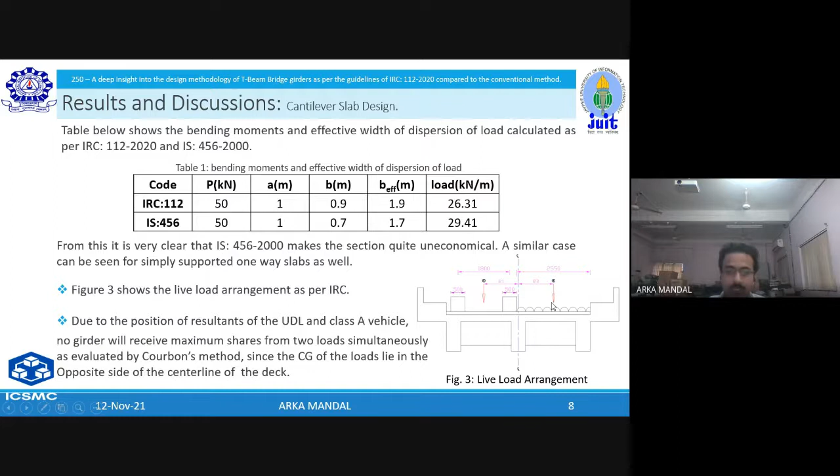Now coming to the computation of absolute maximum longitudinal bending moment. Since the bridge is only 10.5 meter long, it is unable to accommodate an entire class A vehicle, which is 18.8 meter long from axle to axle.

So for the computation of absolute maximum bending moment, we need to consider a subset of wheels, placed in such a way that the midpoint of the CG of the loads and the nearest critical load shall coincide with the center line of the bridge.

However, a better approach is proposed by paper number 11, given in the references in the last slide, which takes into account the dead load as well as the impact factor simultaneously.

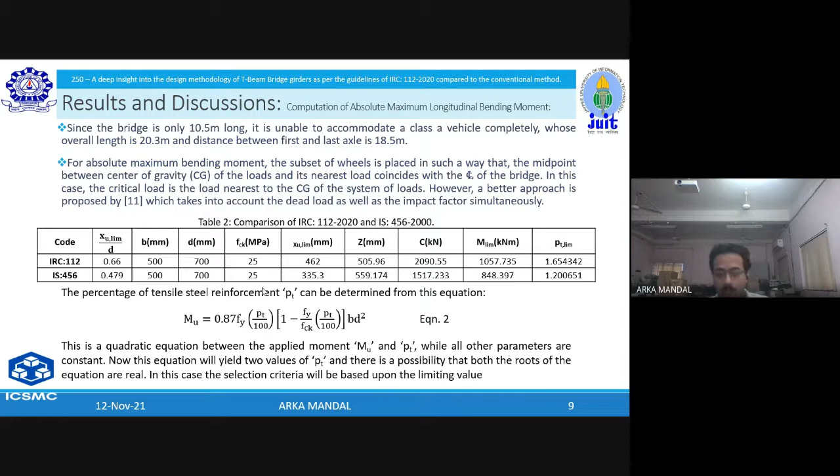In many cases, it has been seen that the greater value of the root, which is greater than the limiting percentage of steel, is considered. In that case, the section design is severely over-reinforced, which might cause problems. So we should always perform the limiting percentage of steel check.

Coming to the cross girder analysis, cross girders apparently look like continuous beams supported on the longitudinal girders. But due to the lack of proper wall or column support underneath, the cross girders somewhat behave in between a continuous beam and a set of fixed beams.

So we are not sure about the exact restraints. Depending upon the geometry and position of the girders, we give weight factors and hence use the method of weighted moments.

In this method of weighted moments, what we do is plot bending moments for the general load cases, that is for UDL and point loads, for two cases separately: continuous as well as fixed. Depending on the geometry and the stiffness, we assign load factors.

In this case, what we have done is given more weightage to the continuous beam part in some areas and more weightage to the fixed beam part in others, and hence computed the final moments. The designers can, at their own convenience, change these values.